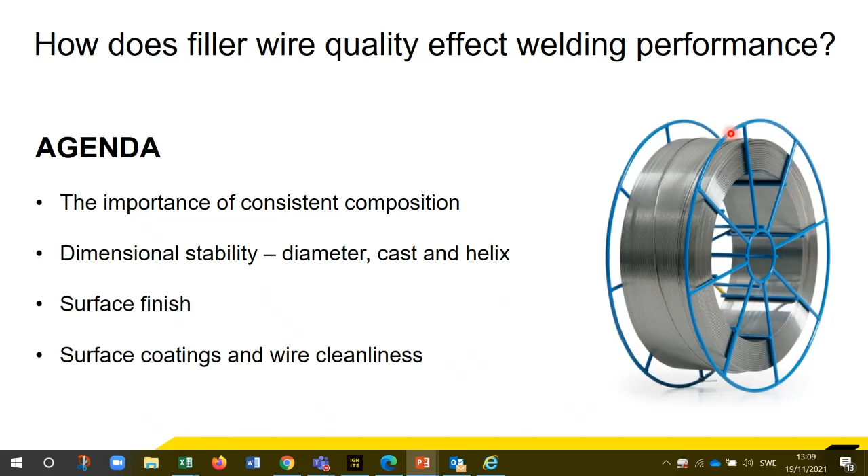Talking about composition, not going into too much detail, but this is typically the elements you would see on a 3.1 certificate for something like a duplex stainless steel. Chrome, nickel, moly - all of these elements have a different effect on the properties of the weld metal.

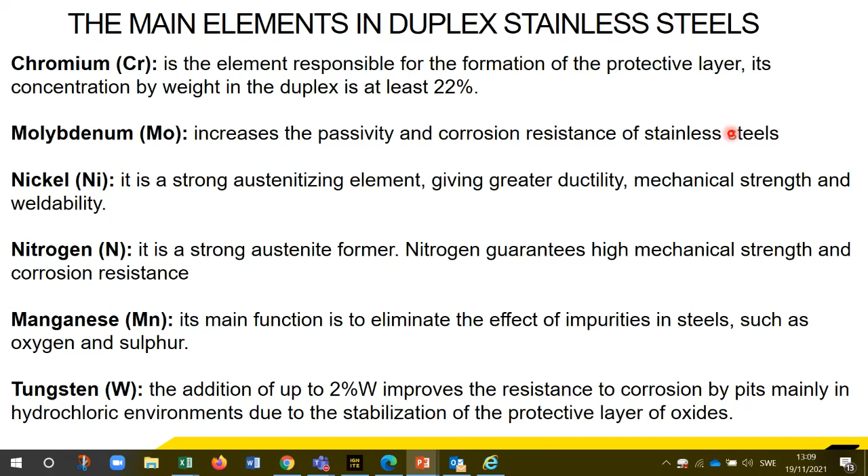As I said, those are the type of things you'd see in a 3.1 certificate. However, what you may not realise is that in AWS, the specification is quite broad and quite wide. So for something like a 316L austenitic stainless steel, the range of chromium is between 18 and 20% - quite a big variation - together with a nickel range of 11 to 14%. So the alloy with 18% chrome, 11% nickel is going to have totally different properties in terms of corrosion resistance from one with 20% chromium and 14% nickel. So it's something to watch out for.

You may not be getting the properties that you would normally expect. Certainly if you've been used to using an alloy with percentages at the top of the scale, and then suddenly you get one at the bottom of the scale, the properties will be different, and you may think you've failed in some way by your procedure or whatever, when it could be purely the filler metal.

Just as important as composition, obviously you want to be at the higher end of the scale to get better properties, but more importantly with something like robotic production, is that it's the same every time. You want the arc to react in exactly the same way between coils, between spools, between lot numbers. So if you've got a robotic process going hands-free for hours and hours, you don't want to change the spool and have to change the parameters. This is more important with automatic robotic production than manual - obviously the welder compensates, but still, if there's a massive range, the welder's going to have to compensate a lot.

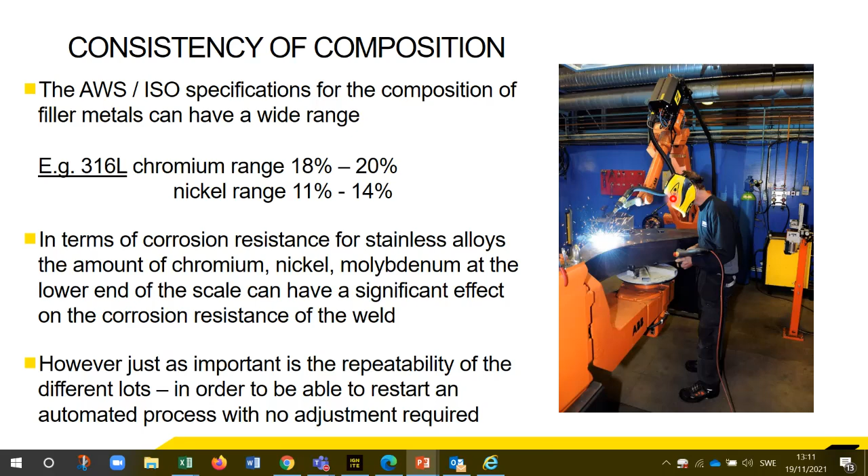Something I would mention about better quality filler metals are these things called microelements. Microelement alloys are added to various alloys basically to improve performance. We call them microelement alloys because they're tiny - down to 0.005%. So they wouldn't appear on your 3.1 certificate. These are the little magic dust, if you like, that improve the properties of the weld metal in terms of spatter.

Obviously, the less spatter, the better. The less grinding, more welding that you're doing is obviously better. Fluidity of the weld pool as well. These microelements have been developed specifically to help that kind of thing.

The more chromium, nickel, molybdenum that you put into an alloy, the less fluid the weld pool is. So to help that, to make it easier to weld, to make sure you've got flow into the root gaps and things, and no lack of fusion, an improvement in the fluidity of the weld pool is a big improvement, and these things do it.

Deposition rate is another good one as well. If you can improve the deposition rate, get the same quality and actually deposit more, then you're going to improve your productivity.

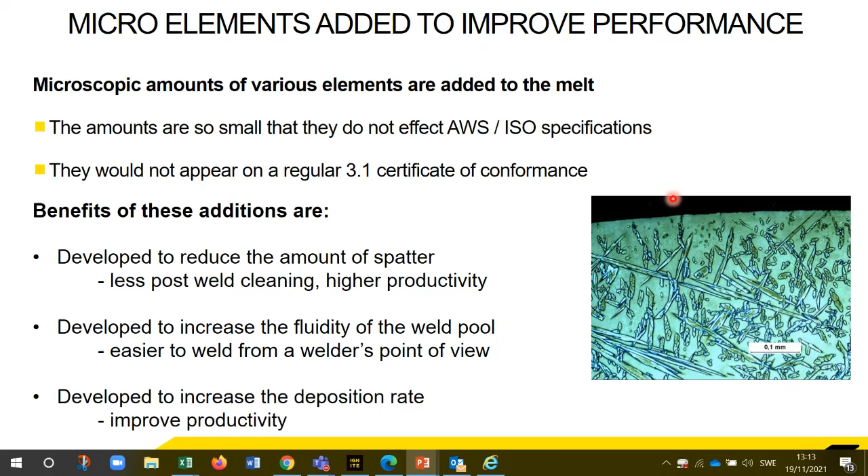So talking about mechanical dimensions, stability, surface finish - how the surface finish affects the wire feed. Now, ESAB's got a state-of-the-art wire mill in the Czech Republic.

Consistency is ensured by virtue of us drawing the last diameters through diamond dies. These are very, very stable, very hard, and last a long time. So you know that at the beginning of the spool, the diameter is going to be the same as at the end of the spool, to within 0.0001 millimeter. Not everybody does the same.

If you don't use diamond dies or some kind of spinning or rotating dies, then there's a possibility that you're going to get wear in there to some extent. And if that doesn't get noticed, then you get a different diameter.

The drawing and annealing sequence - obviously, as you're drawing the wire it gets smaller and harder. So you can't just have a solid, really brittle, hard wire at the end, because that's no good to anybody. So it's got to be annealed somehow. There's a sequence of drawing and annealing to make sure that at the end, when it is being spooled, it's exactly the right toughness, ductility, and hardness.

And again, we've got a state-of-the-art mill to make sure that happens. If that's not consistent - if it's not as rigid a procedure as ESAB have - then there's a possibility that the hardness and ductility could vary, and certainly could vary between lots.

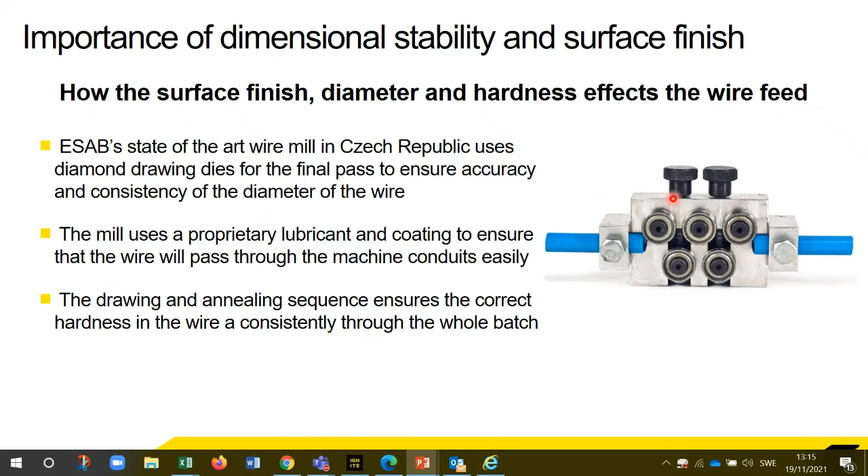What you don't want is too much, and what you don't want is patches where it's thicker and thinner on the surface. So consistency is what we're talking about. This is an illustration of the surface finish effects of the wire.

So this graph is plotting the power, the amount of amps taken by the drive rollers on a wire feed unit. What you can notice is the average amount of current required is quite high, and there's a lot of spikes, a lot of variation. So that means the surface finish is taking a lot of power, then less power, then a lot of power again - the surface finish varies across that.

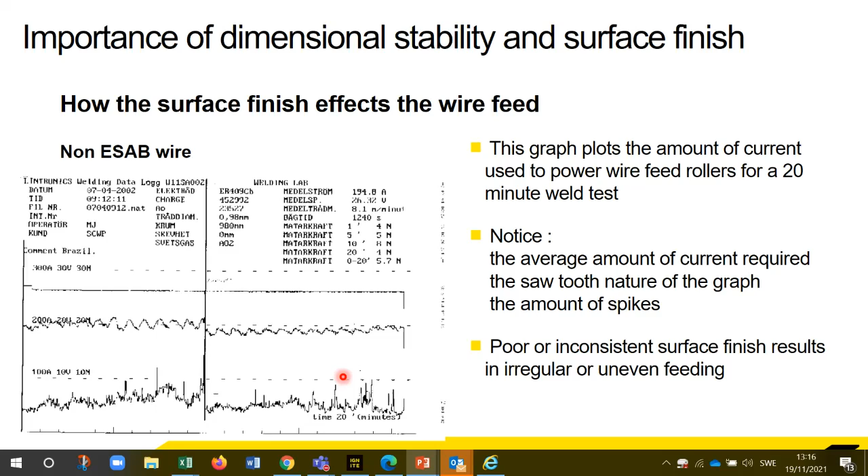So it's inconsistent - you're not going to get a nice, smooth, consistent feeding. If you compare it to this graph, which is an ESAB wire with exactly the same parameters, it's a 20-minute feed test, which is what we do for every batch.

You can see the whole power usage is lower, the average is certainly lower than previous, and the spikes are not so high. It's more constant, more even. That means you're going to get a better, more consistent feeding. This helps.

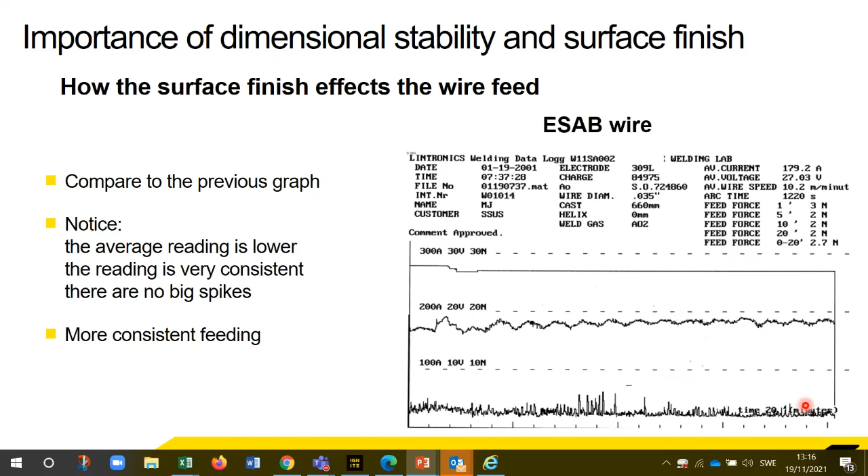Cast and helix - these are terms used particularly for spooled wire. Again, what you want from a spool of wire is that at the beginning of the spool, at the end of the spool, and the next spool and the next lot, this helix and cast are the same. So the helix is a distance.

If you cut off a couple of meters of wire and hang it from something - a pencil, your finger, whatever - then the distance between the two coils is the helix. Now we have a maximum of 25 millimeters, but the smaller the better, basically. And again, it's better if it's the same - it doesn't matter if it's 25 millimeters or 0, but if it's always 0 or always 25 millimeters, that will help.

Similarly, there's obviously a twist - some tension put into this wire to enable it to come off the spool, and that puts a cast into it. So you throw the 2 meters of wire on the floor and it will naturally form a circle. The diameter of that circle is what we call the cast, and again, we're looking to achieve roughly 1 meter.

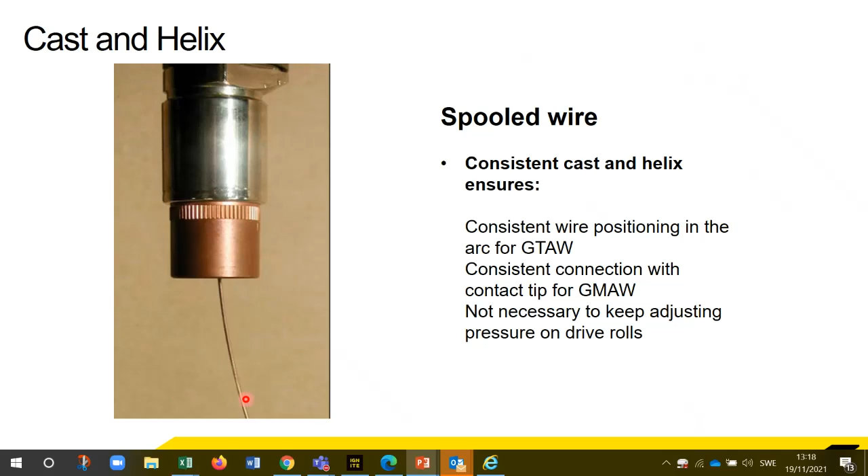It's not so much of a problem with manual welding because the welder can compensate, but he shouldn't have to. But if you've got automatic welding, then it is quite important. And certainly for an auto TIG - I'm sorry, I've only got a diagram of manual TIG here, but the principle obviously is exactly the same.

You're pushing the filler metal into the same place. If for whatever reason the cast of the helix of the metal changes, then the end of this filler rod is going to vary, so it's going to enter a different position of the arc. So the weld is by definition going to be different - it's not going to enter at the optimum position where you want the filler metal to enter the arc.

Again, consistency. The more consistent the wire, then the better the weld will be.

And the cast on this is basically the height - if it springs up from the floor, then it's the height of the spring. Again, consistency - it's exactly the same effect. Whether you're feeding these machines from 15 kilo spools or a bulk pack, you're after consistency, and it's quite important, and it will affect the quality of your weld.

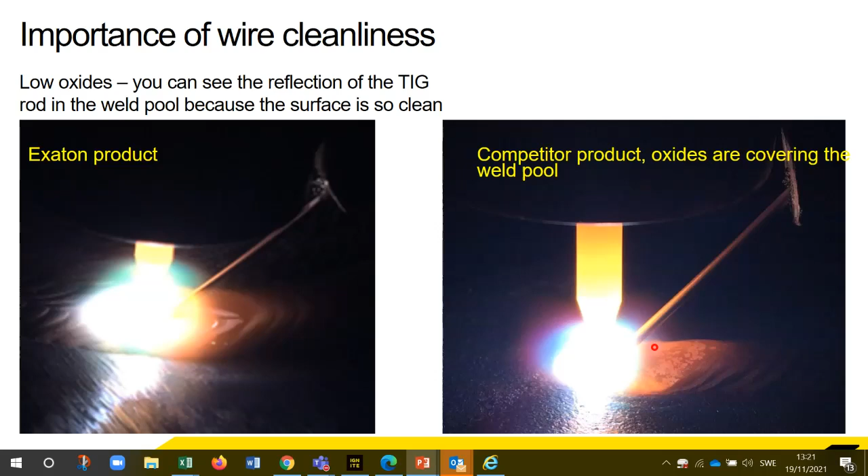And the last slide that I have is showing this welding of a TIG. If you've got a buildup of black soot, oxides, lubricant on the surface of the wire, then you end up with a very big black scaly oxide pool. Essentially, we don't get that, but this will absolutely illustrate it.

So what I've been trying to put across is the importance of good quality wire that's got a good composition with good mechanical properties, and the surface finish, the tension, the dimensions are consistent. If they're consistent, then you get more of a chance of getting a good quality and consistent weld.

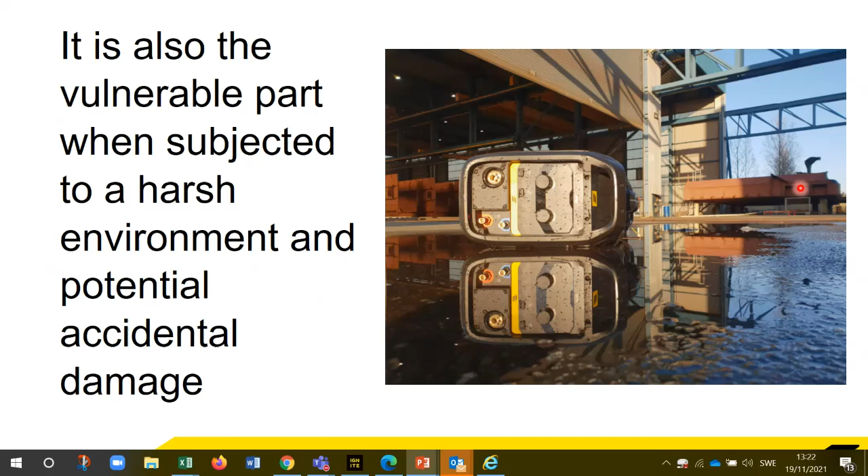A high quality wire is important to ensure consistent welding, but also an important component of any MAG system is the wire feed system. It's also the most vulnerable part, and it's often subjected to a harsh environment and is often exposed to potential accidental damage. One potential solution is RobustFeed.

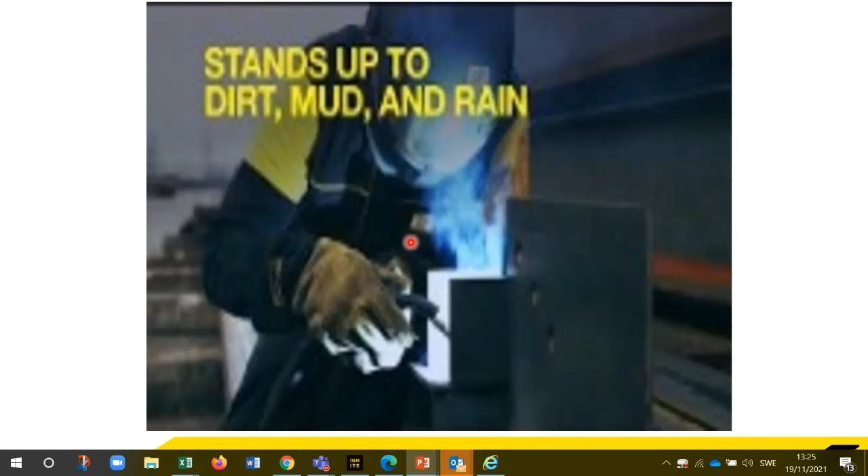You can see from the video, the RobustFeed is highly portable. It's got 3 ergonomically designed handles to enable safe lifting, and it can be passed through small gaps, such as in the bottom of a ship.

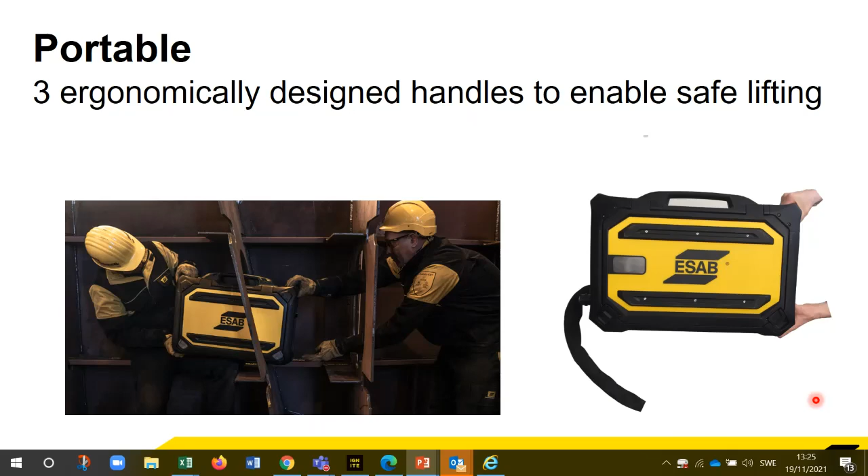The wire feed unit can be used in 2 positions: upright, and flat. All we have to do is simply rotate the control panel through 90 degrees.

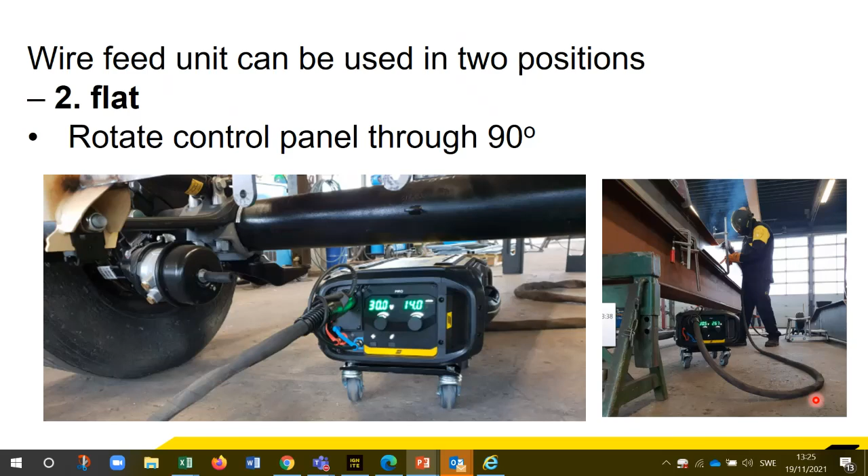It has a rugged strain relief mechanism that protects the internal cables - the control cable, the power cable, the gas cable - from any strain. So you can actually suspend this by its umbilical on the locking mechanism on the right hand side of this slide without any damage being caused.

Sometimes getting the wire feed unit onto the spigot on top of a trolley can be difficult. So on the RobustFeed, we put a slot at the bottom. You simply locate the spigot on the slot, slide along, and it drops straight into the hole.

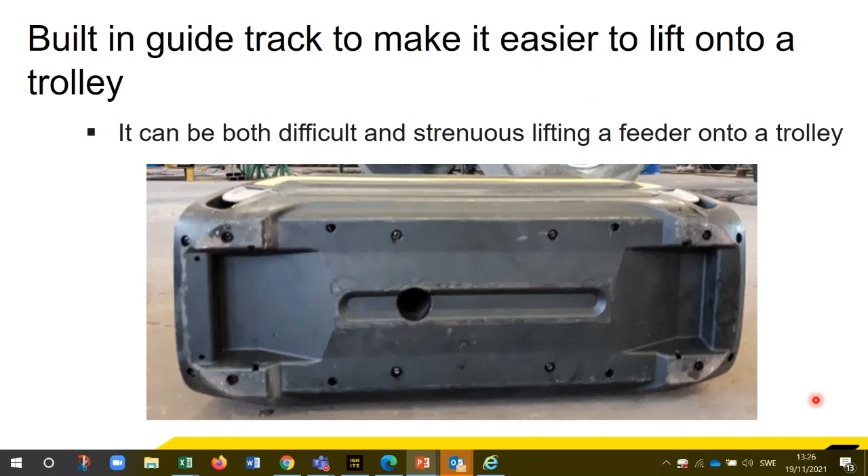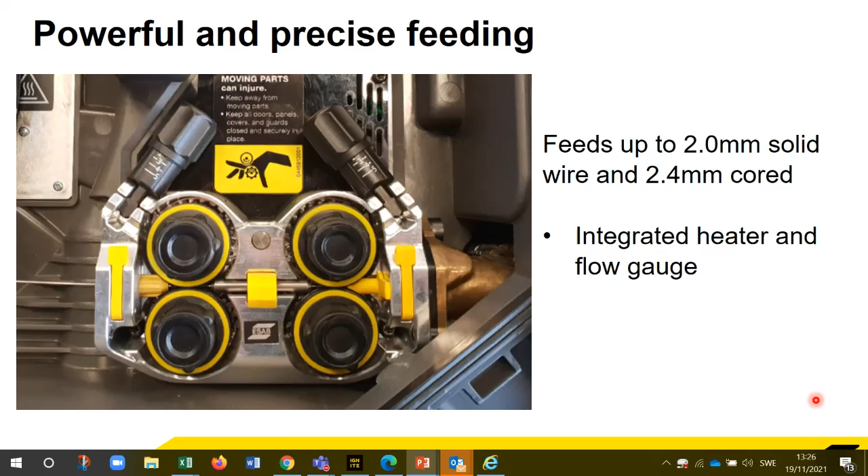We have a brand new wire feed system which is exceptionally powerful and precise, and it's also got an integrated heater and flow gauge inside the wire feed unit itself.

We require no tools to change any of the components on the wire feed system. Both the inlet guides and wire rolls can all be done without any tools at all.

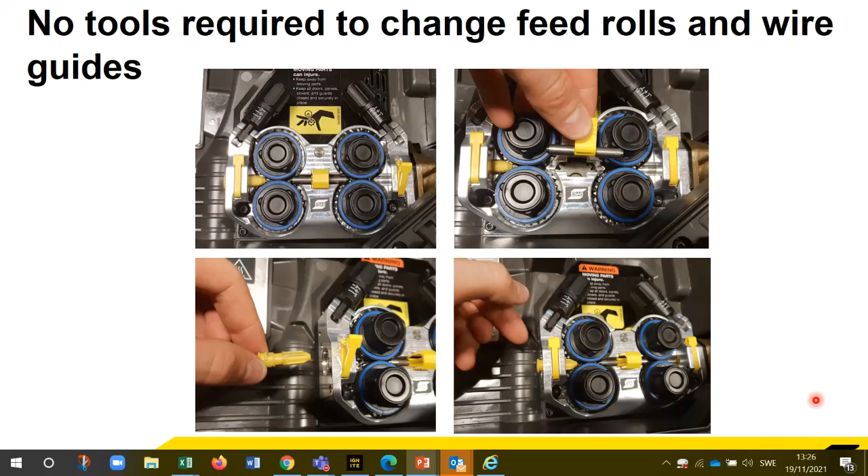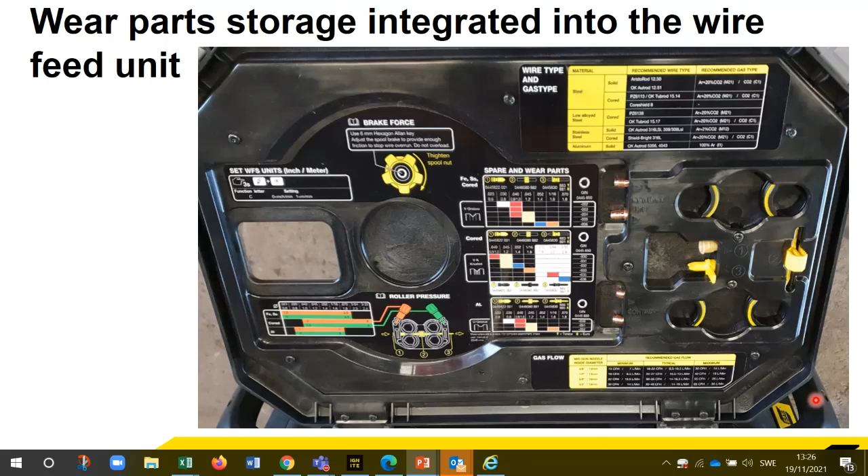We have a wear parts storage system which is integrated into the lid of the wire feed. Here you can store your contact tips, your wire guides, your feed rolls.

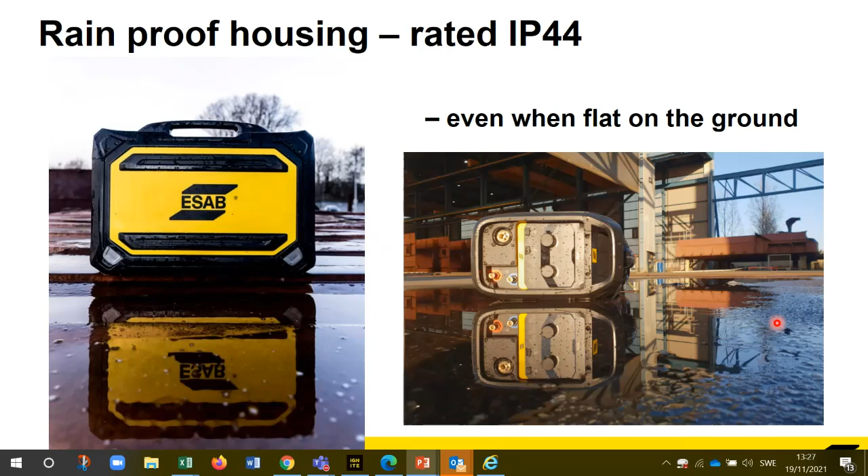It has a rainproof housing, rated IP44, which is probably the only one on the market that is rated IP44, even when it's on the flat ground.

RobustFeed can operate at temperatures as low as -40. As I said before, we have an integrated heater system inside the RobustFeed which enables it to have its own microclimate, so it protects the wire.

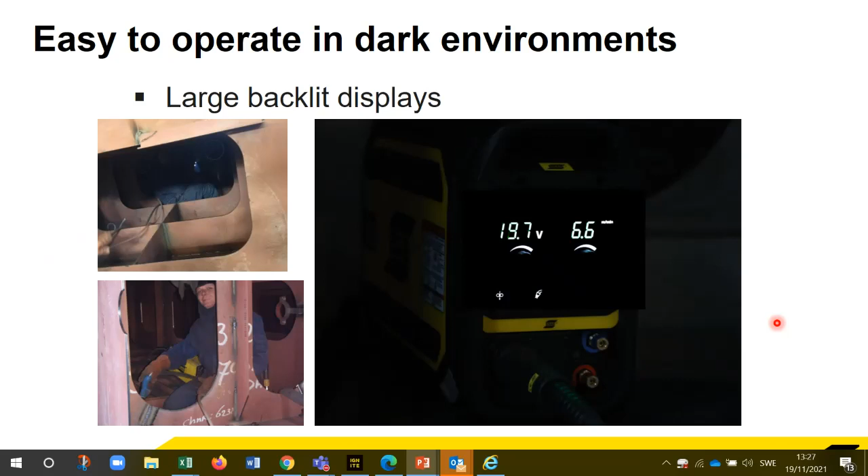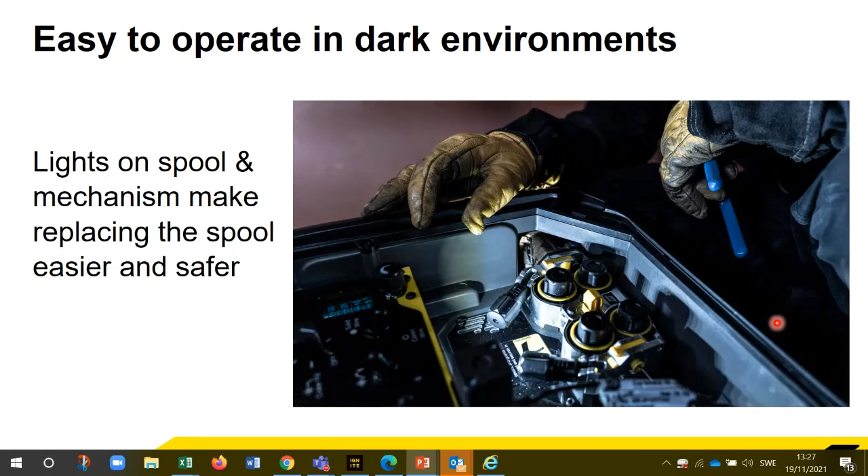It's easy to operate in dark environments. It's got large backlit displays, an illuminated wire feed system, and an illuminated area for the wire, so you can actually see when you're putting the wire onto the spool. We also have lights and a window so you can see through onto the wire, which is also illuminated.

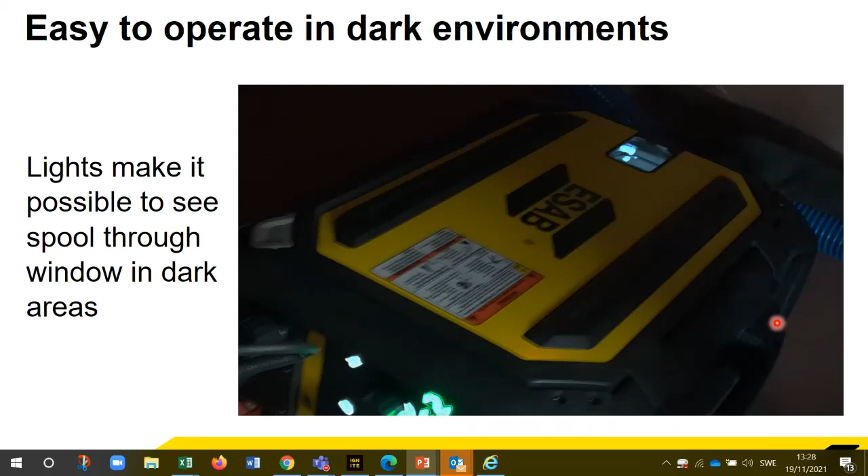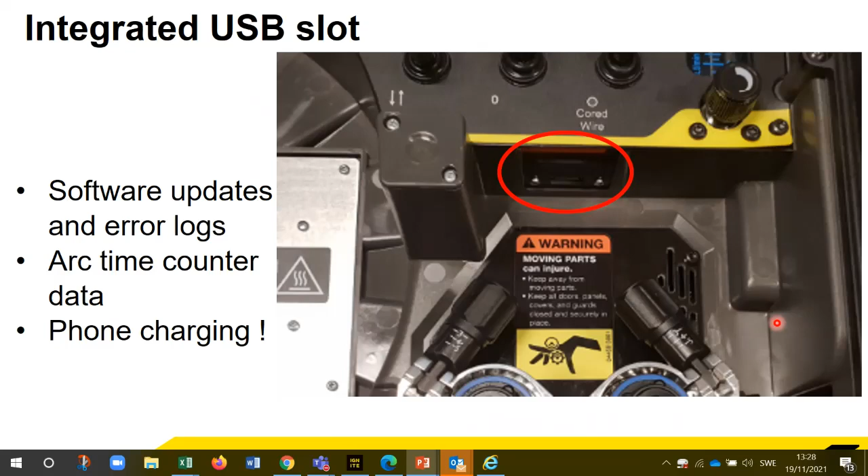We also have an integrated USB slot. This USB slot can give you software updates to the wire feed system. It can operate as an arc time counter, and it can also charge a mobile phone.

So just a quick overview of the RobustFeed. It's robust and reliable, with a strong and precise wire drive system. It's highly portable, mobile and maneuverable, and safe for crane lifting. It's rainproof in vertical and horizontal positions, and operates in dark environments with lights inside and backlit symbols. It's multifunctional, with many accessories to go with it. It's externally insulated and short circuit protected, has integrated wear parts storage, and its operating temperature is from -40 to +55 degrees C.

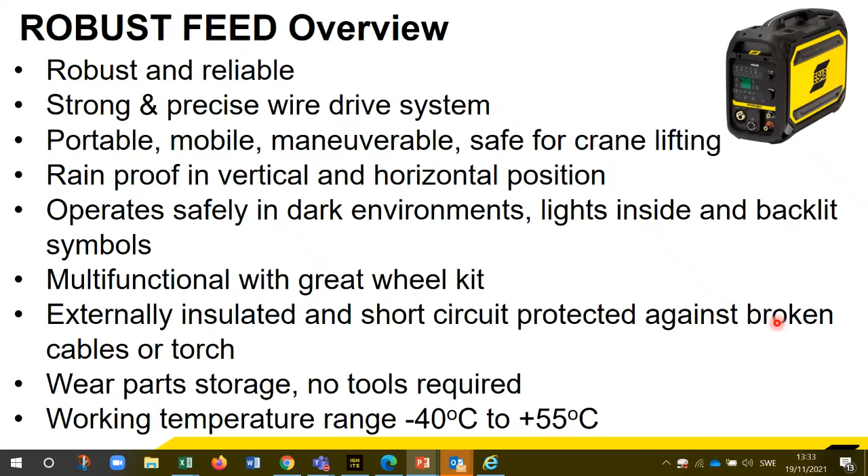So that needs to be considered. The other thing is what Peter mentioned in his presentation, and that is to measure the cast of the wire. I can put that back on the screen. It's a good indication of the consistency between batches.

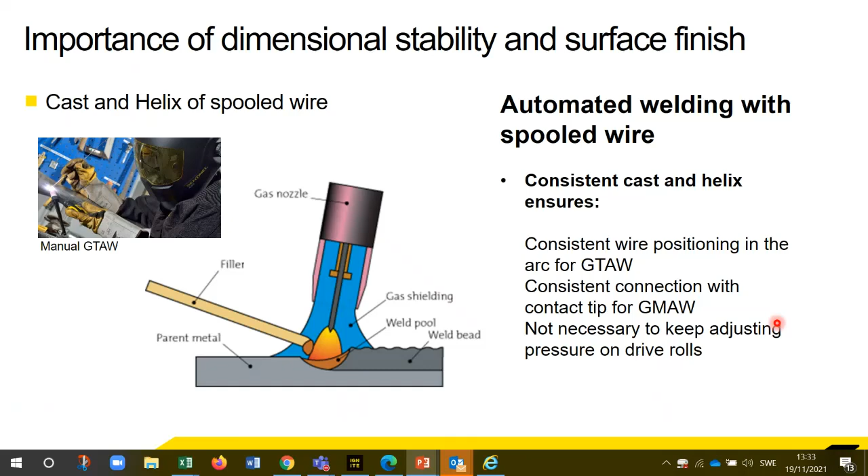If you cut off a couple of meters from the spool—straight from the spool rather than through any guides—then you'll know the guides haven't had any effect. Cut a couple of meters off, throw it on the floor, and you'll see the diameter it forms naturally and the distance between. The diameter is the cast, and the distance between is the helix, as I said. If that's not easy, you can literally hang it from something, free hanging in space, and again it'll form a cast naturally, with a gap or not between it.

Really, a check would be to see if there's any difference between the spools that are working successfully and the spools that are not. Check the cast and the helix—that's a quick check just to see whether something's varied, before you have to go into any kind of metallurgical investigation or hardness tensile checks.

Okay, thank you Peter for that. But I would also like to add, if you have such kind of indication, please don't hesitate to contact Peter or myself. Then we will take it really deeper in that regard. But the first thing is really to check the cast and the helix, and that goes for all kinds of wire products, whether on spools or on bulk pack like Marathon Pac.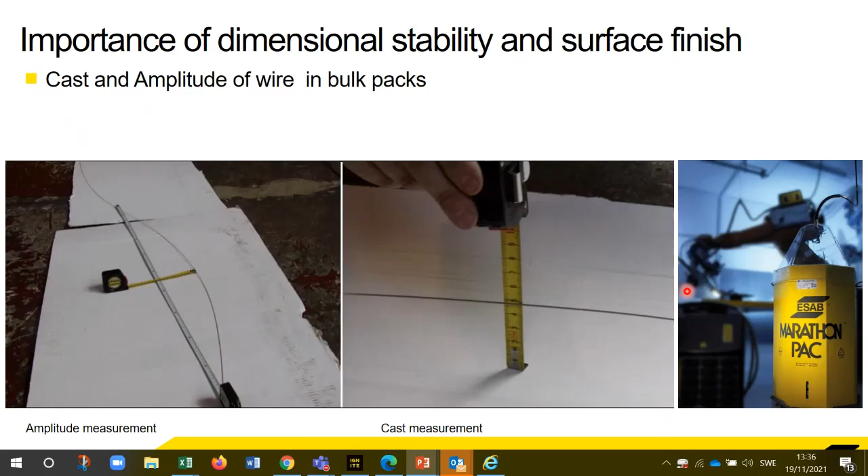Peter—yes, there you go, exactly what I said. Just chop off a couple of meters and throw it on the floor, and then you get your answer. Yes, very easy to see.

The next question goes to Richard: what is the duty cycle of a RobustFeed at 500 amperes? It's 60%. And at 400 amps, it's 100%.

I see also that the person who put the question regarding the wire and the wire feeding—yes, it's due to a very narrow access, coming back to the question before. Thank you for putting up this question, it was very interesting to discuss. So please get in contact with us.